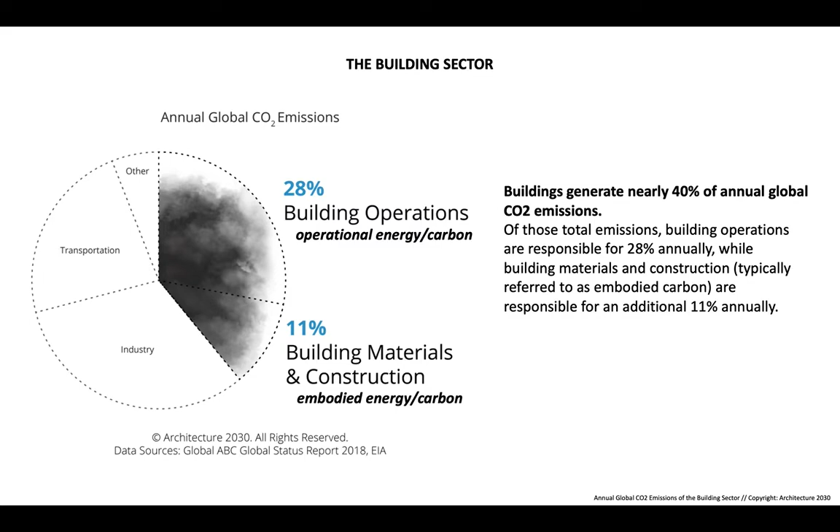Looking forward, we can see that with the projected growth occurring, and the fact that operationally buildings are becoming more efficient due to increases in energy efficient appliances, glazing efficiency, and the sealing efficiency of building envelopes, the embodied carbon of materials and construction processes is expected to surpass proportionally the operational carbon. So this is where we really need to focus our energies and our innovation going forward.

Of course, we have to keep this in mind as a mandate, as a responsibility, because we're expecting global built floor area to double by 2060. And these are the same decades in which over 130 nations have committed to achieving carbon neutrality.

Fortunately, it's not too difficult to focus on what we need to solve, even if the solutions are not so easy, because only 3 of the primary building materials—concrete, steel, and aluminum, those most representative of the modernist era—account for 23% of global CO2 emissions in their production. So by finding innovative ways to substitute or improve these, we can do a lot of good for the world and the built environment, and this gives an immense responsibility to us as designers, architects, and planners of the built environment.

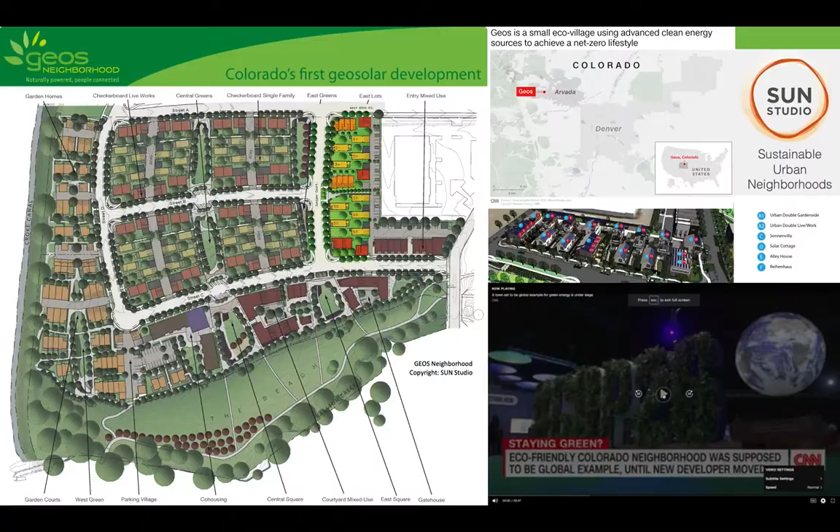I now start with one of my first projects as an intern in Denver, Colorado, USA. I was fortunate to engage with the production of the GEOS neighborhood, which was the nation's largest net zero master plan neighborhood, entirely powered by solar panels and geothermal facilities. The plan includes 308 units, 29 of which have been constructed so far.

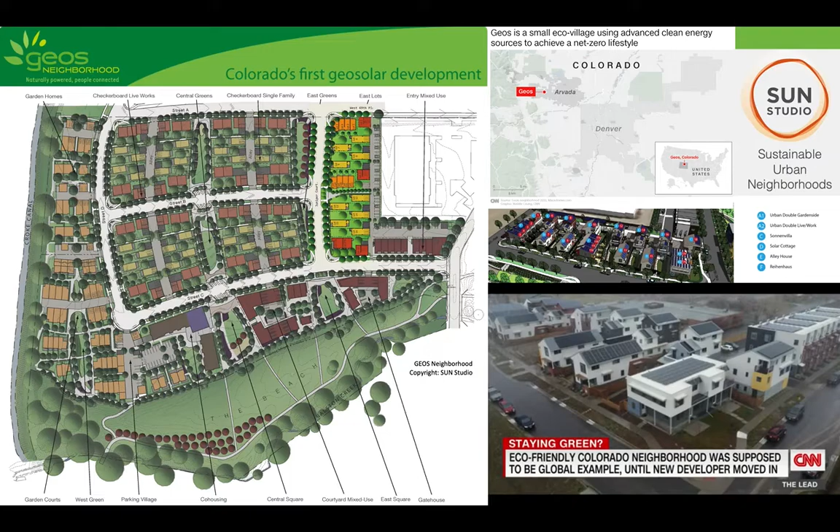The video playing in the lower right is a segment from CNN extracted during the COP26 conference, showing that even in a scenario like the United States, where financial and energetic resources are available to power this neighborhood, there are still problems with entrenchment, with policy, and with standard practice.

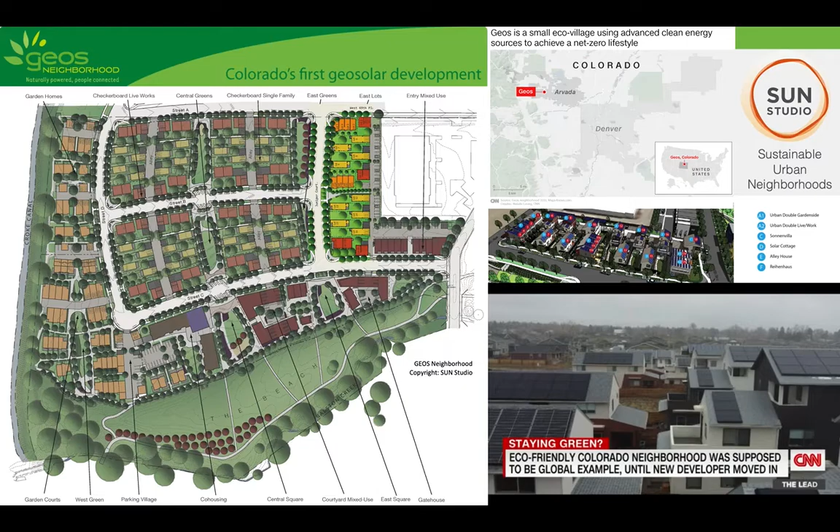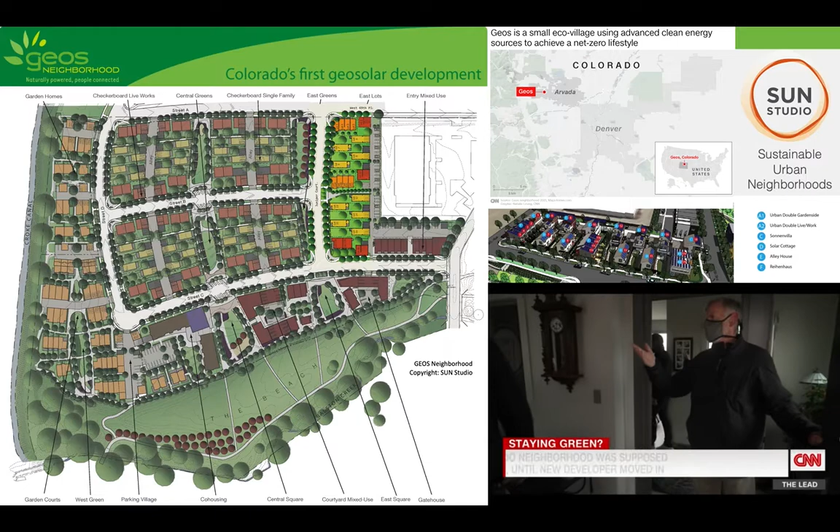A new developer has taken over the second phase of construction of GEOS and is attempting to install gas lines, even though the entire design works perfectly well without fossil fuel power. Fortunately, the residents have taken it upon themselves to create a grassroots resistance and to promote the continued development of GEOS in this net zero manner.

However, even though there are these challenges in well-resourced areas, understanding that most of this growth is anticipated in places like Africa and Asia, in middle-sized cities where resources and infrastructure are less available, I realized I needed to study more locally integrated ways of producing carbon neutral and energy secure buildings and cities of the future.

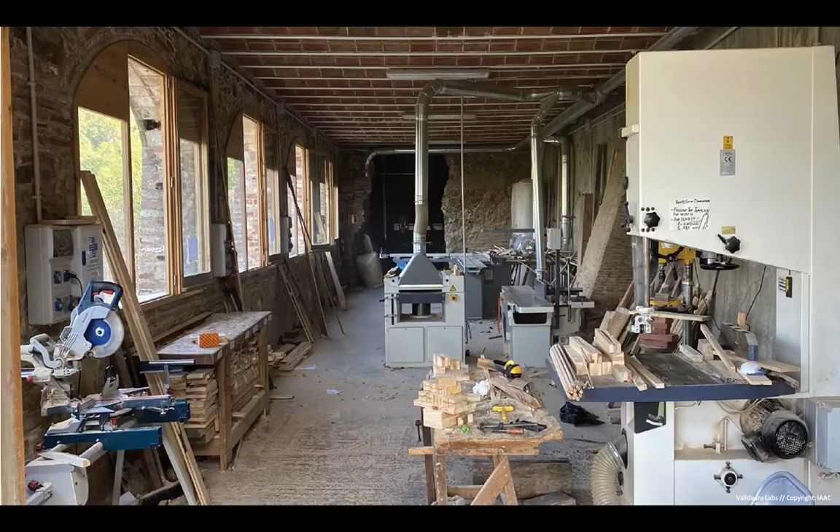Valldaura is anchored by a historic masía, a Catalan farmhouse created in 1888, but has since been renovated to host a fully fitted digital fabrication lab, including laser cutters, 3D printers, electronic prototyping equipment, and a more traditional carpentry lab with industrial tools like a planer, a table saw, a bandsaw, and in the back a CNC shopbot as well.

These combinations of tools are critical because they allow Valldaura to act as a holistic metabolism, taking energy and materials from the forest all the way through manual processing, digital processing, to create advanced building products and eventually even advanced prototypical buildings. So the lab is not bounded by the walls of this building. In fact, the lab includes those 135 hectares of forest as a singular integrated metabolism.

The theories at Valldaura and the practices are based on the teachings of the directors and their works, such as the idea for the self-sufficient city, an integrated network of networks that comprises rainwater catchment, greywater recycling, waste recycling, energy production, bound together within the network of a city block, able to be exchanged between buildings for resilience on that scale, as well as exchanges between blocks to create this true network of layered networks for resilience and efficiency.

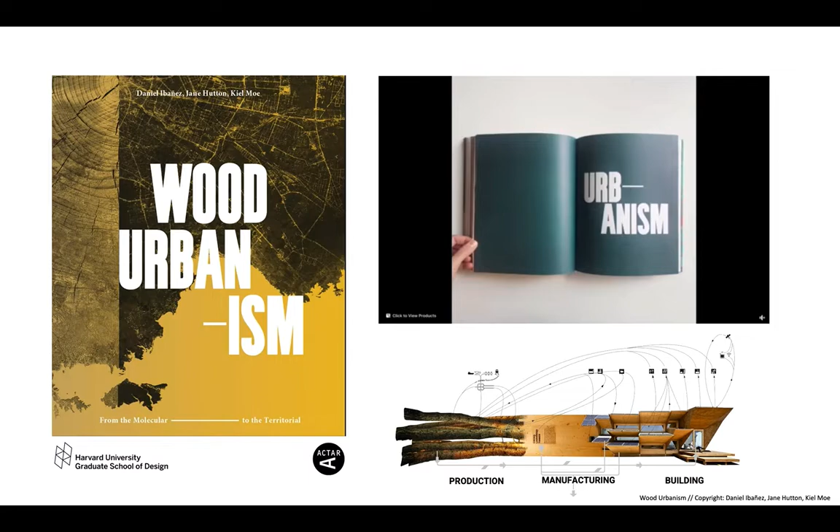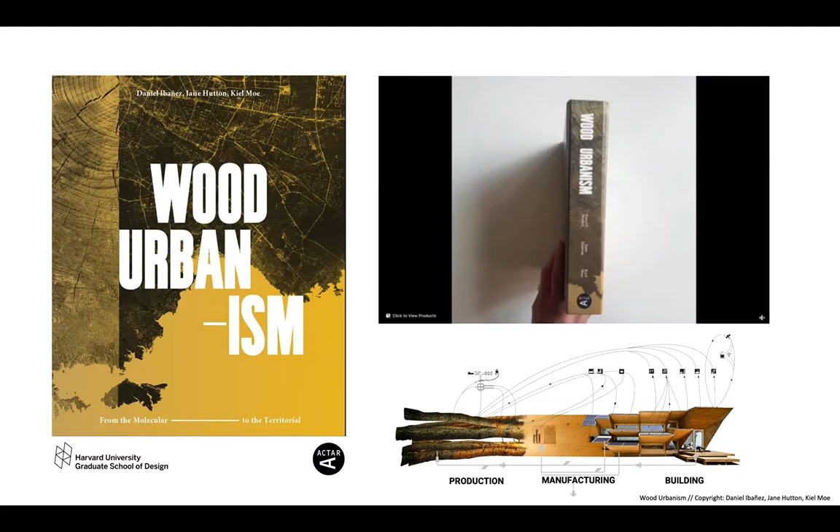This is also supported by concepts of wood urbanism, promoted by another director of the lab, Daniel Ibañez, from the Harvard GSD, which emphasizes the potentials for timber and mass timber in buildings, not only for the new design capacities the materials so light and dynamic as timber provides, but also for the carbon sequestration potential and that relationship to energy and the embodied energy of the materials, throughout their entire value chain. Because they are so light and carbon sequestering, we can reduce the invested energy in the production of the material and eventually the production of the building.

There are actually 4 ways we can think about this carbon sequestration potential of timber. One is substitution during life, as mentioned in the introduction, by using a carbon sequestering material such as timber in place of concrete, steel, and glass. We avoid the carbon emissions and the energy intensity of those materials.

We also have substitution at end of life, the fact that timber can be cascaded many times. It can be disassembled because it is light, it can be remilled because it is a soft, easily machinable material, and ultimately, if need be, it can be used for biomass or for composting, being an organic material.

Of course, we also have the direct sequestration, which is the carbon captured in the timber itself throughout the growth of the tree's life cycle. And we also have the ecosystemic sequestration, which I think is really critical, relating to the fact that by promoting the value of timber resources and creating sustainable forest management plans to produce those resources, we can create a forest which ultimately performs the ideal carbon sequestration as well as many other ecosystem services. Because while young trees sequester more carbon during their growth, mature forests with their soil diversity sequester much more carbon and therefore help us achieve a climate-stable planet.

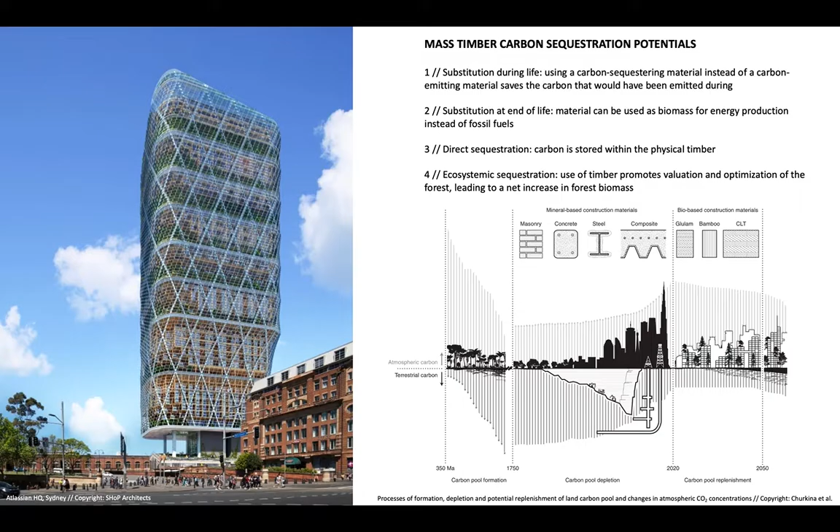So what we actually have is a very new forest, dominated by pioneering species, especially the Aleppo pine trees, which do not provide the optimal diversity for life in the forest by shading out other more mature trees and shading out the undergrowth.

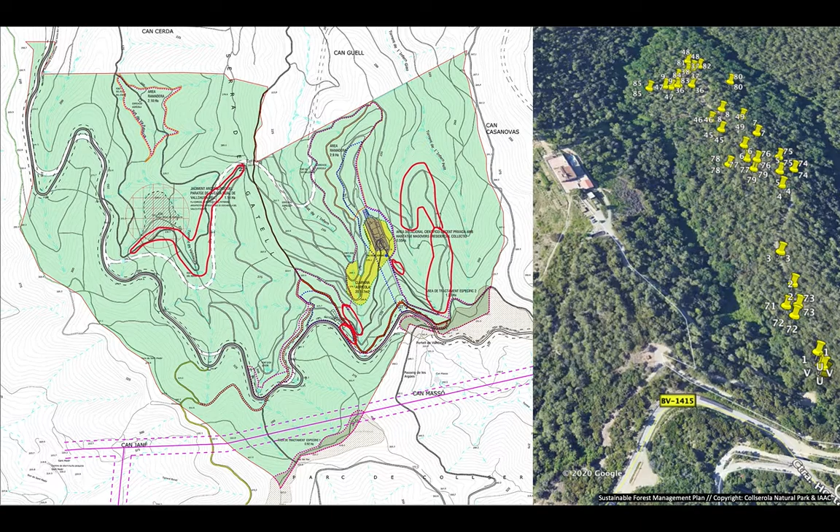Operating within the forest management plan of the park at large, we individually select trees which we know will be useful in our projects and experiments, but which will also improve the health of the environment through the removal. We go through every step possible to record all kinds of data about these trees, to understand their biomechanics, but also to understand their role in their ecologies, as well as to develop aesthetic techniques and start to understand how the forms of the trees and natural materials might inform the forms of the products that they are built from.

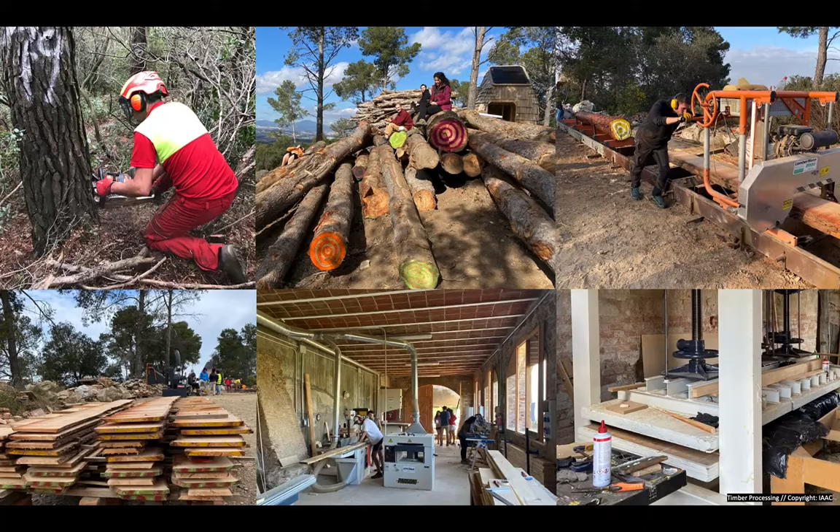The entire value chain occurs on site experimentally. We built this entire system comprising all of the tools and workflows to harvest the trees, to keep track of them with simple techniques like paint color, to mill them into boards, to cure and dry them with sun and wind, and then to process them eventually into advanced materials like cross-laminated timber.

Traceability is a key aspect which we maintain with simple techniques like paint here, but could be scaled up with techniques like RFID tracking or DNA sampling at a larger scale. And we prototype tools, also digital tools, to help architects understand where their materials are coming from, because we can only know how much energy or carbon is invested if we know the whole life cycle of the product.

Geographic provenance plays a big role in that, as well as the material category itself. So we've developed these digital tools that help architects and non-specialists see where things are coming from and the way that affects their carbon sequestration or carbon emission ratios.

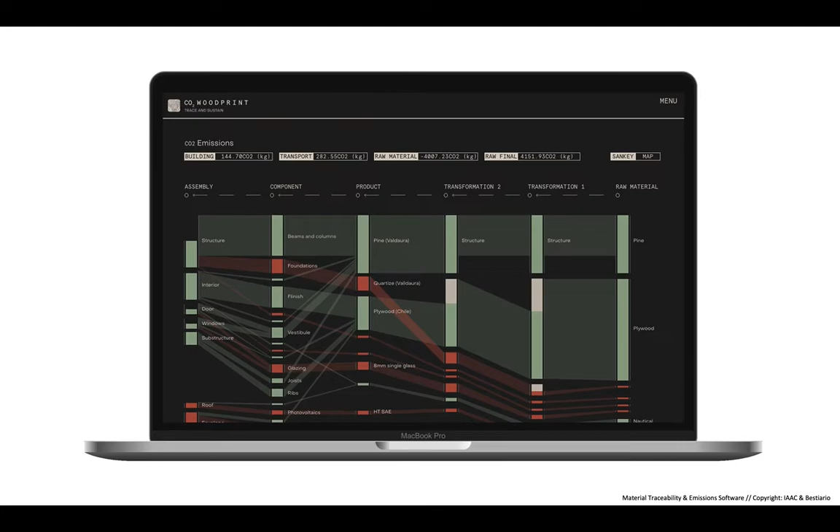This helps us to prioritize a design, to understand that choosing things like local timber for structure really does outweigh the things that we can't necessarily improve upon, such as the carbon invested in solar panels produced overseas. We also tell these stories in the building, so it's not just about optimizing, but communicating the reason for optimizing to the users.

So we've developed augmented reality apps that allow you to scan building elements, see their trace back to their source of origin, either go back to that place to make sure that removing that tree did have the intended effect on the surrounding ecosystem, but also to connect the user to that tree and to the material metabolisms of their space.

Educating the next generation of design professionals is the only way that we're going to get these theories and practices up to scale. So while I was at Valldaura, after graduating from the Master in Advanced Ecological Buildings and BioCities, I helped to coordinate the program for future editions.

And we teach students here not just how to build, but also how to live in an international way. The program draws students from all over the world. We often have between 10 and 20 nationalities in the student group at any given time. Most of them live together on site for a full calendar year, so they see all of the ecological seasons, and they learn about growing food as well as others' traditions and communal life in addition to building and design.

Every year this program culminates in a full-scale, one-to-one prototype of a real working building that is completely autonomous, completely off-grid, completely self-sufficient. These are small buildings because they're designed by students quickly on a low budget, usually within about 8 weeks for the design and construction, but they embody these very large ideas.

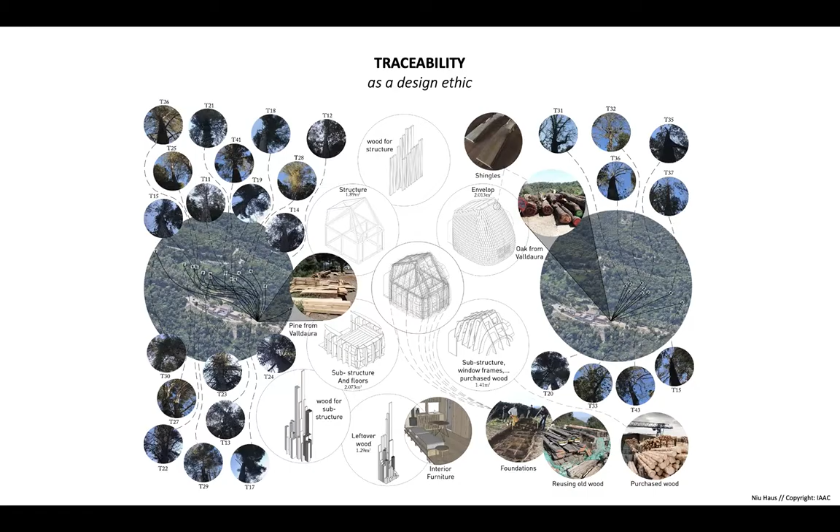We kept track of all the materials on site, enabling this traceability aspect that I discussed, understanding how we can apply computational milling and other advanced techniques to achieve efficiency and new design capabilities, and carrying this through to every aspect of the building.

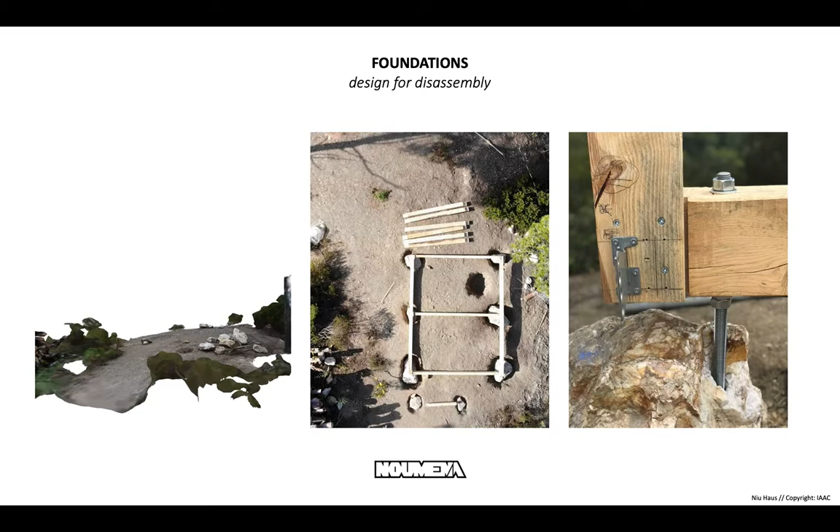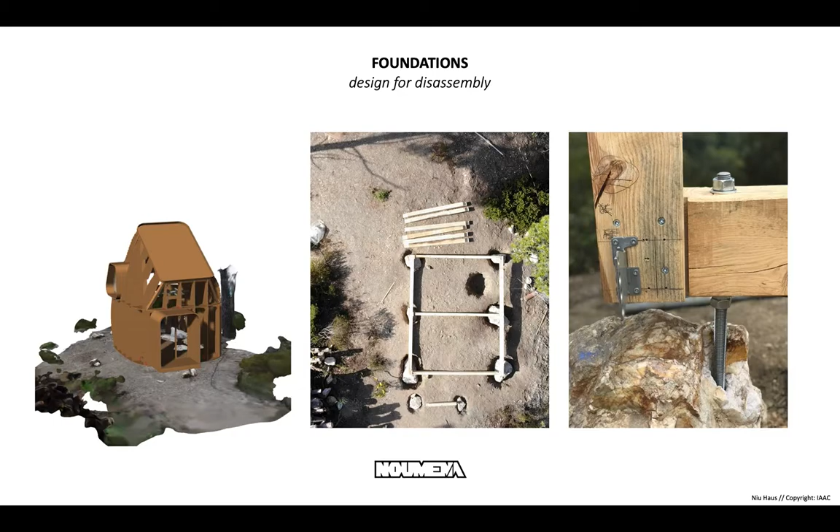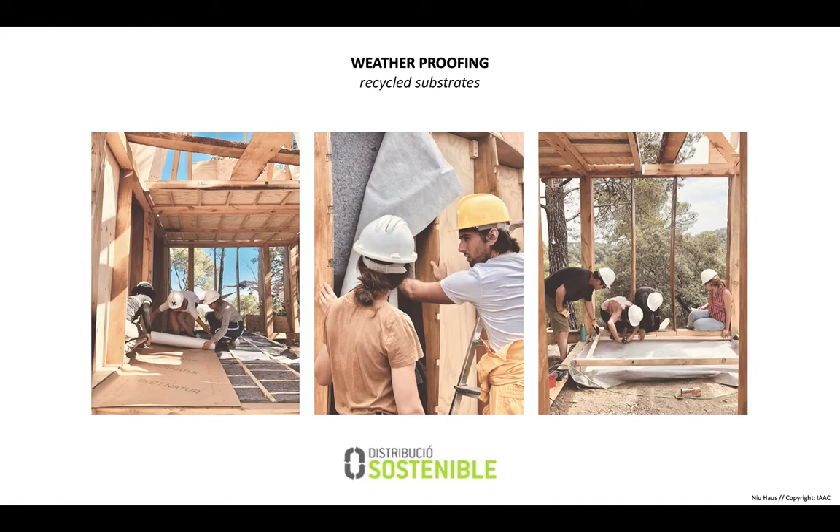So using timber for the structure, but also thinking about foundations that could be done with local materials like quartzite, so that the building can be disassembled at its end of life and the materials circulated without disturbing the site. Thinking about waste systems that can process human waste just with a microbiome of worms and bacteria to create compost. Recycled materials for insulation and membranes like cotton and rubber.

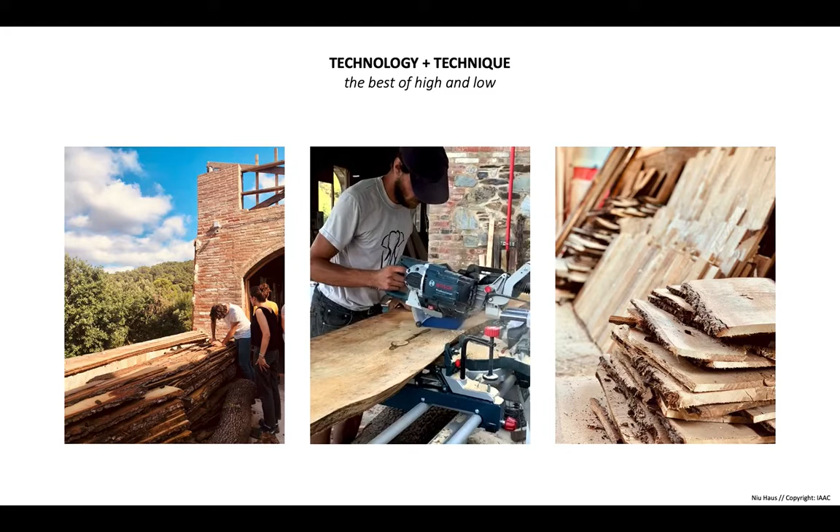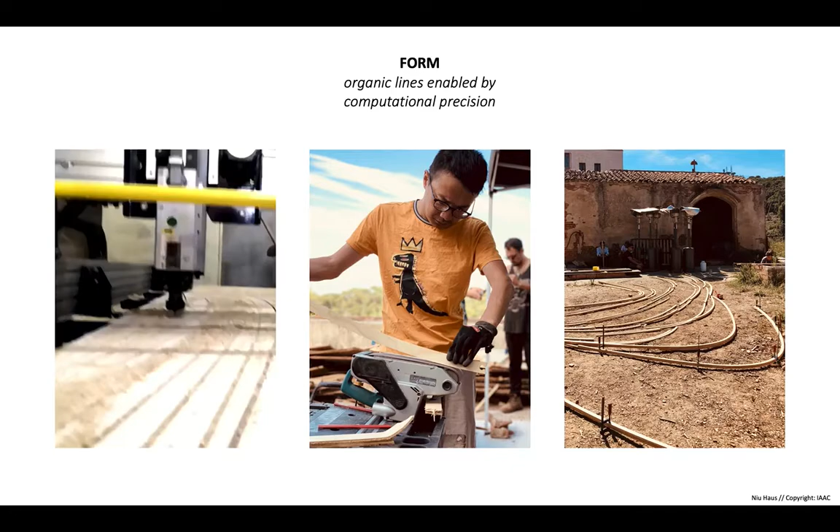Combining advanced tools with low-tech tools, understanding what is best for the job, not just using the tool for the tool's sake, but for the effect's sake. Sometimes achieving this does require advanced tools when we're trying to achieve certain geometries that respond to natural parameters or give a certain aesthetic, as well as to optimize in certain cases. Understanding that there are just a few students working on this project with limited budget and time, we need to make intelligent decisions, in the same way we need to when talking about large-scale projects and large budgets because of the resources involved.

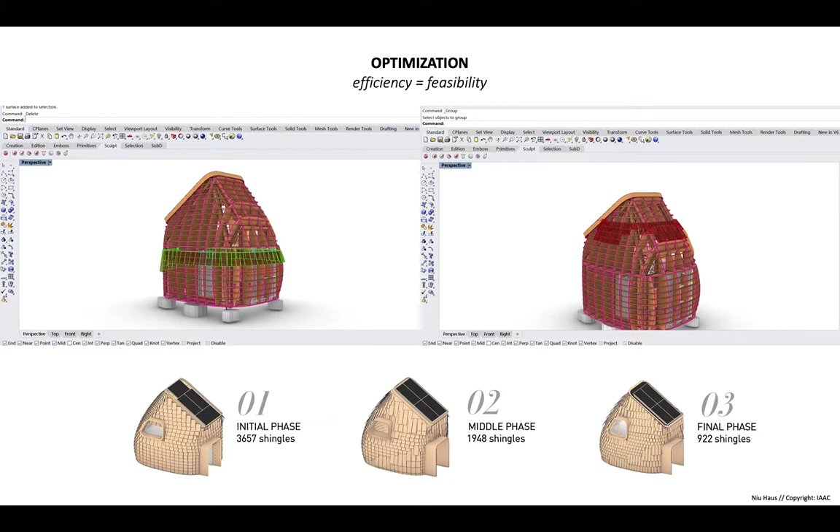So creating scripts for optimizing facade panels and so on and so forth.

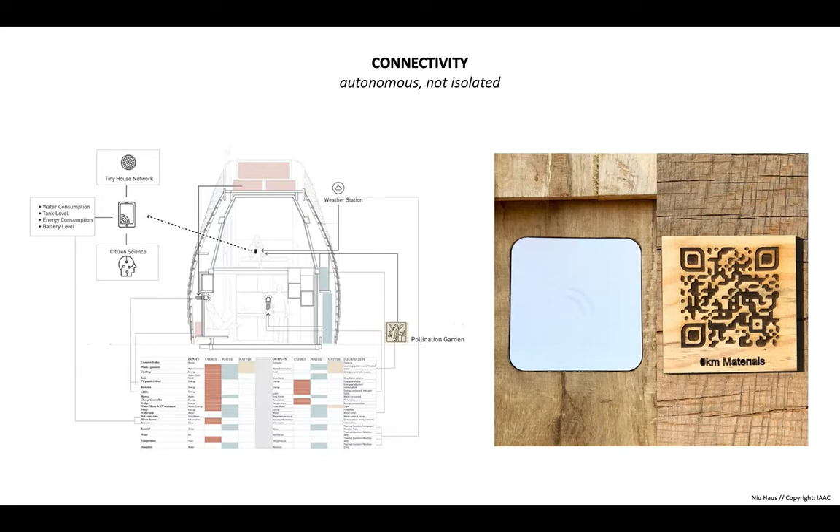Engaging our students in every aspect of the metabolism. Most of these students have an architectural background, but here they're installing water systems, solar-powered water heaters, waste systems, photovoltaic systems, every aspect of the building's life and metabolism. Maintaining, of course, so that having an ecological and energy-sufficient building doesn't mean giving up your lifestyle or reducing opportunities in any way. These buildings are off-grid energetically, but fully connected with information. It serves as a weather station for the area and is connected by Wi-Fi to the network at the main house, so you can stay connected and live a contemporary lifestyle, while immersed in this incredible ecosystem.

And here are the results of the first project, the Niu Haus. This was the project I managed as a master's student. Just some images to give a sense of context for the results and the way it is integrated naturally with the environment from which the materials came. Of course, acknowledging that this was a very collaborative effort, only realized thanks to the help of sponsors as well as instructors and other students.

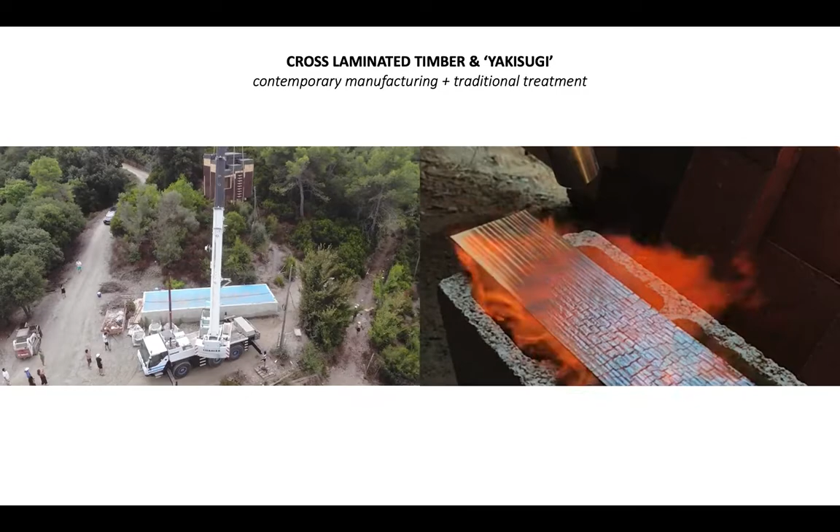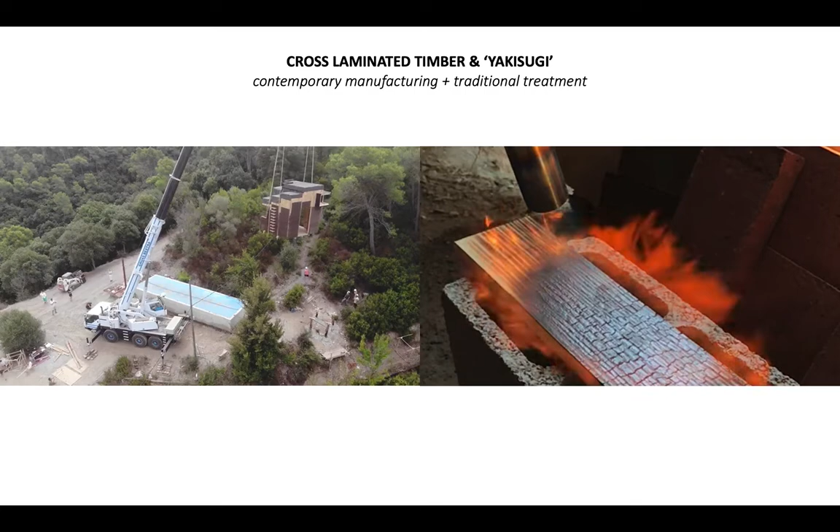The success of this first year enabled me, as a staff member of Valldaura Labs, to oversee the next round of students in their construction of another prototype, using cross-laminated timber to build fully off-site and rapidly deploy, as well as new finishing techniques based on the Japanese yakisugi tradition to protect the building from water and infiltration of pests, while maintaining full compostability and bio-based materiality.

This resulted in the Voxel, a quarantine cabin, named for the program because it was built during quarantine. While most of the world was biding their time or working from home, our students, because we were able to self-isolate here in this community, were building on the ground with their hands, creating something truly beautiful and valuable for the world. And the results, I think, speak for themselves. It's quite a nice project.

Again, also incorporating photovoltaics on the roof, as well as a small green roof and rainwater catchment system in this case. It should also be noted that the virtue of cross-laminated timber in this project is quite evident. We can see that this single system is able to serve as structure, as well as a thermal and acoustic barrier, and an incredible interior finish.

Most recently, the third edition of the MAEBB completed their final project, another international team, this time thinking about energy — not just the energy required to light a building or run its operation, but also the energy we have to digest as humans to stay alive, food energy, and the relationship between electricity and calories, understanding that energy is not just electricity, but all kinds of different forces.

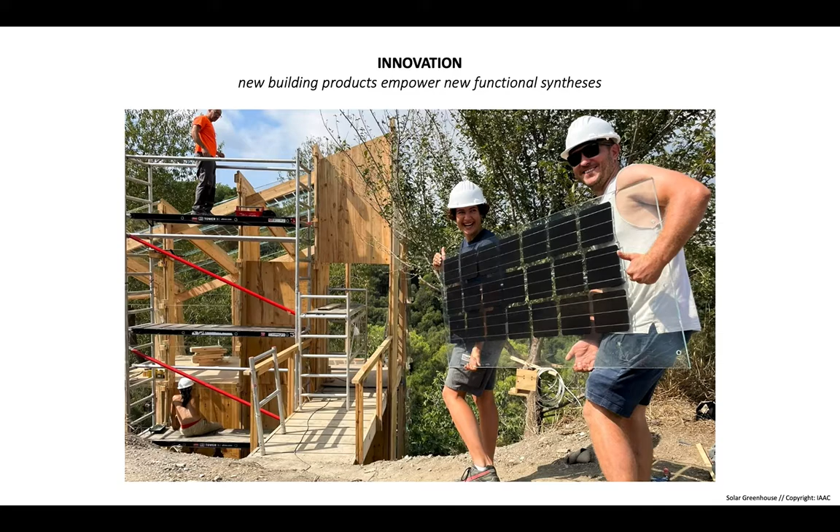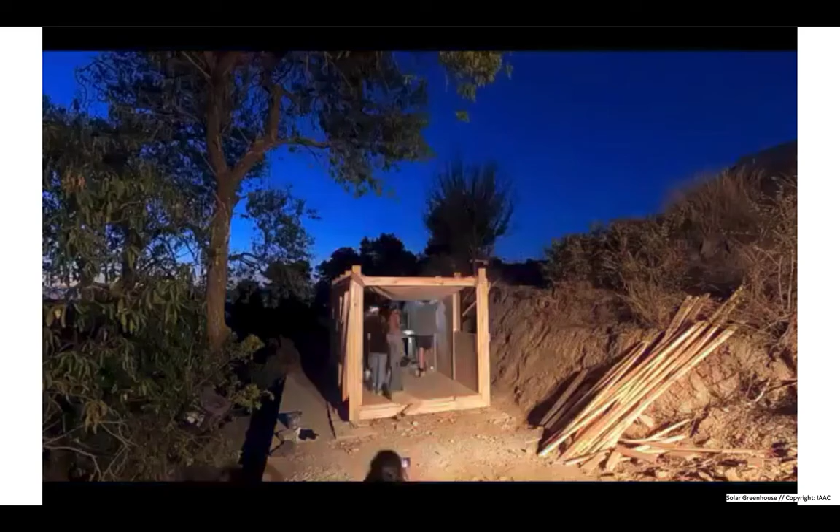So again, we went through this process of constructing on-site all of these various prefabricated components to create the solar greenhouse. This is a facility that leverages both passive conditioning, with its orientation towards the sun and ventilation, and the production of energy through photovoltaics that still allow enough transparency to perfectly grow plants below, and are able to power the lights as well as the irrigation system for all of these plantings.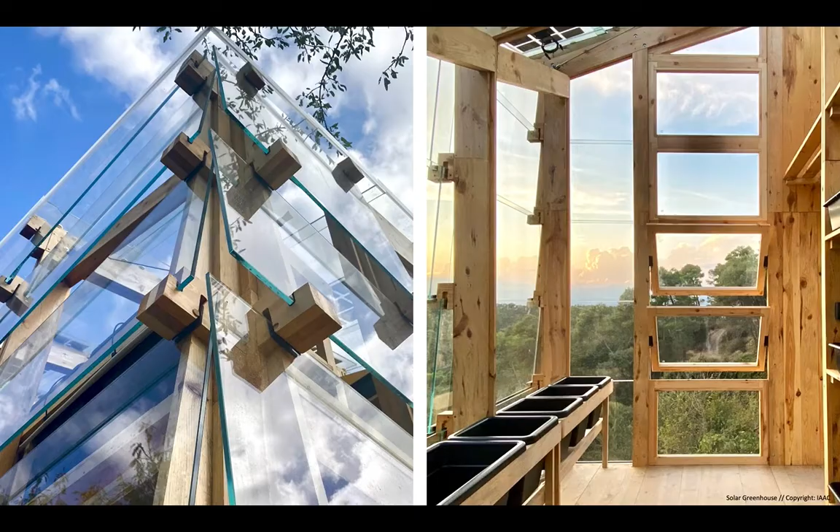And here you can see this embedded in our gardens at Valldaura and its role in this productive ecosystem. Also maintaining beauty, understanding that nothing is sustainable if people don't desire it, so beauty is always an utmost priority.

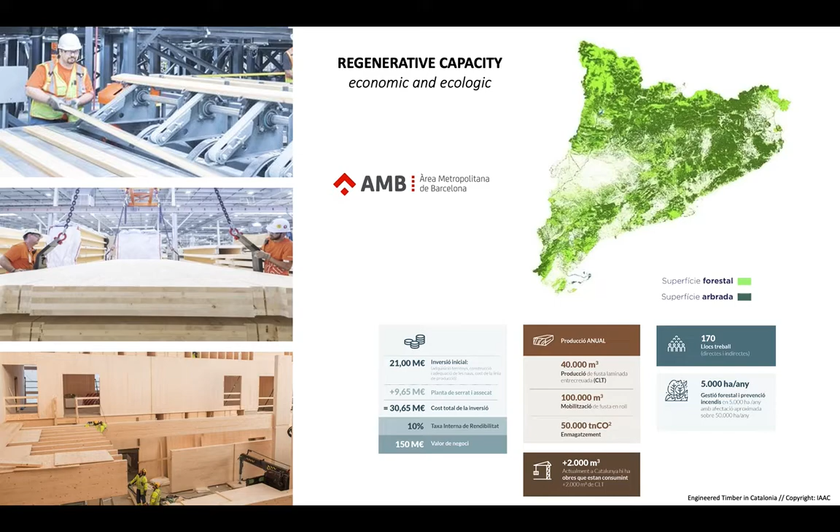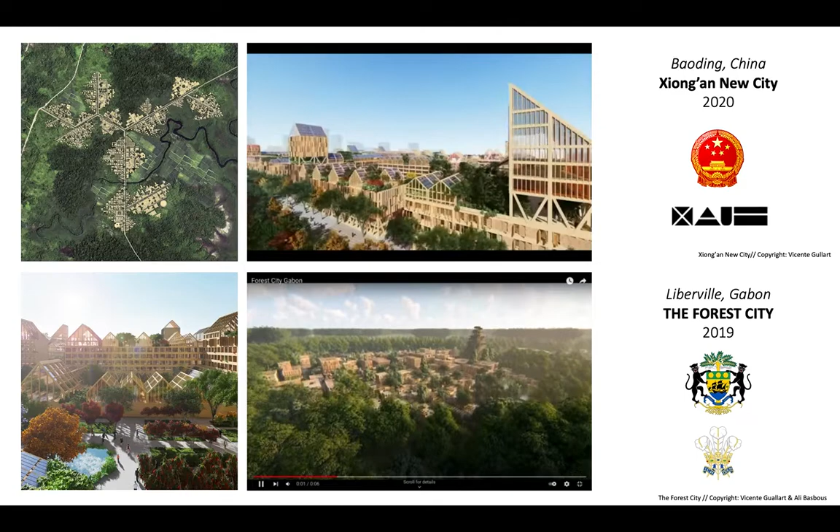By scaling these small prototypes up to larger regions, we can really make an effect on the world. We can think about local forest resources, like we've done in partnership with the municipalities of Catalonia. We can also think about combining these different technologies into urban systems at scale in places where growth is anticipated, like China or Africa, adding up to a worldwide circular bioeconomy as promoted by the European Forest Institute.

Which we have also supported and developed through authorship and co-authorship of texts that help policymakers, academics, and designers understand how to implement these theories in the real world. The Green Book of BioCities is one particular publication I was able to co-author in partnership with notable architects such as Stefano Boeri, as well as groups like the Politecnico di Milano, the European Forest Institute, the USDA, and a number of other notable organizations that are really promoting and pushing forward these theories.